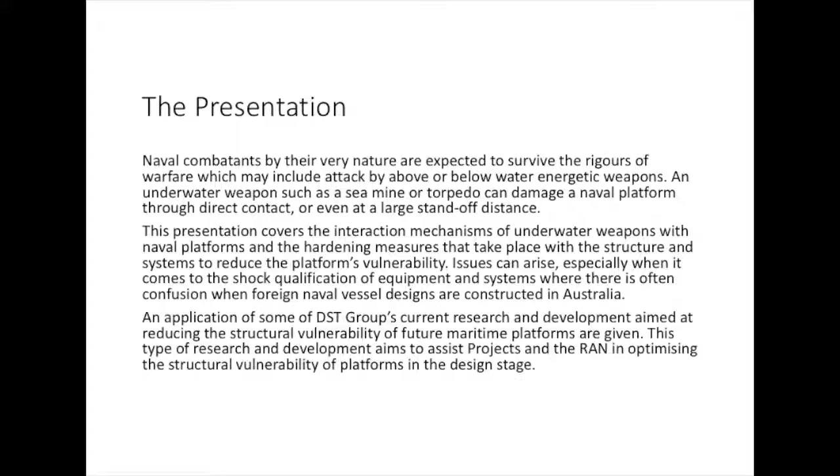So for those of you who don't know me, my name's Warren Reid from the Defence Science Technology Group. We're down on the Fisherman's Bend side, 4K down Lorimer Street here.

I guess what I'd like to do today, and I could have gone on for a long time, but considering it's winter solstice, I didn't want to go on too long tonight. What I hope to do is give you an overview of the underwater shock loading area, how it applies to naval platforms. As part of that, I'll cover some aspects of what we call equipment vulnerability, structural vulnerability of naval platforms, and then finish up with the last 10 or 15 minutes looking at whole platform shock testing to explain what that's all about.

A bit of corporate advertising here first, from Maritime Division of the Defence Science and Technology Group. We have sites at Fisherman's Bend just down the road here, also at Edinburgh South Australia, HMAS Stirling over in WA, up in Sydney, also smaller sites up in Queensland, probably test sites and so forth, about 2,100 people, I think, something of that order.

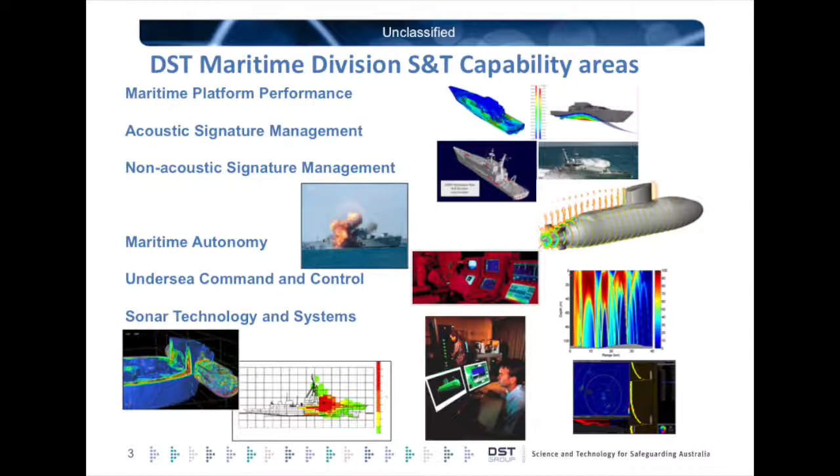In Maritime Division, we have what we call 6 major science technology capabilities. I'm part of the Maritime Platform Performance MSTC team that looks after this. We also have at Fisherman's Bend Acoustic Signature Management MSTC, Non-Acoustic Signature Management MSTC, and then in Sydney we have a Maritime Autonomy MSTC, and then spread across Edinburgh South Australia and also HMAS Stirling Perth we have 2 other MSTCs looking after undersea command and control, and also sonar technology and systems.

Since survivability, maritime warfighters try not to be fired at generally. So the outer layers of the onion represent not being seen out there, for instance. As you begin to move into the centre of the onion, if you are seen, you try not to be targeted. If you are targeted, you try to avoid a hit from a weapon that might occur. But ultimately, what I'm going to be talking about tonight is if you are targeted and the weapon does hit you, what we can do, or what we have done, to try to protect those naval platforms once they're hit by a weapon.

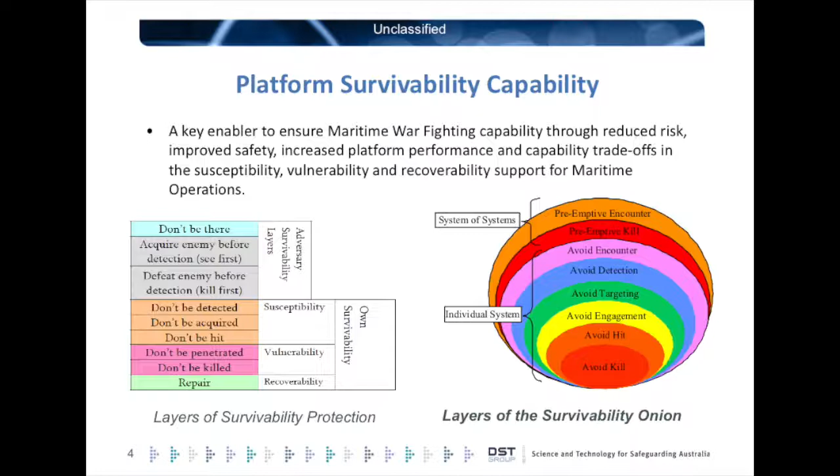Effectively, to survive, you can divide these areas up into what we call susceptibility, so trying not to be detected; vulnerability, which is the area I'll be talking about tonight, so what is the vulnerability of the platform if it does get hit; and there's also an area called recoverability, so after you have been hit, how can you recover the platform, or how well can you recover it and get back onto your mission.

So the group I look after is what's called the Dynamic Military Loads Group, and I get asked by a lot of people, was that something about moving logistics or moving defence equipment around the nation? But effectively for us it's looking at the immediate structural and equipment systems damage from a weapon attack, and we do all this work in support of the Navy, trying to give them much greater confidence in the survivability of their particular platforms.

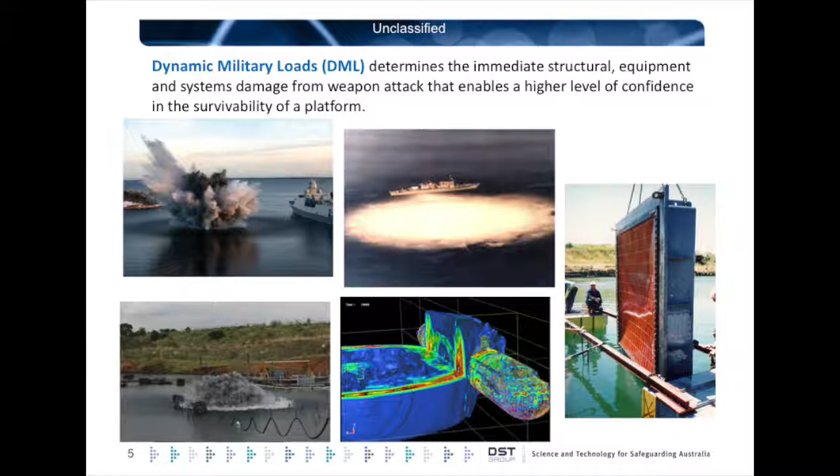In that particular area, the 4 areas that we consider in the work we do for the Navy are looking at the structural vulnerability of platforms, so how a structure will respond to a dynamic weapon loading. Obviously on naval platforms there's a lot of equipment on those ships, so there are aspects of equipment vulnerability or survivability of that equipment on board the platform. We also do a little bit occasionally on human vulnerability, as the performance of the systems is only as good as the performance of the humans on board, so if the humans are damaged, for want of a better word, then they can't operate those systems. And we also look at aspects of the requirements or the shock standards as they apply to Navy platforms. I guess there is a requirement on a lot of our platforms in terms of wanting a certain performance of that platform, in this case in an underwater shock loading environment.

Okay, so what is an underwater explosion? Whether it's an explosive that detonates in air or underwater, it's basically the same physics, but we get different behaviours of an explosive underwater.

If you imagine an explosive charge detonating, we usually use a detonator, a very high voltage detonator, to detonate explosives. When you detonate an explosive, you get a very high speed burning of that explosive, typically in the thousands of metres per second. That burn moves through the explosive charge, and when it gets to the outer perimeter of that charge, a shock wave forms and enters the medium, whether that be air or water.

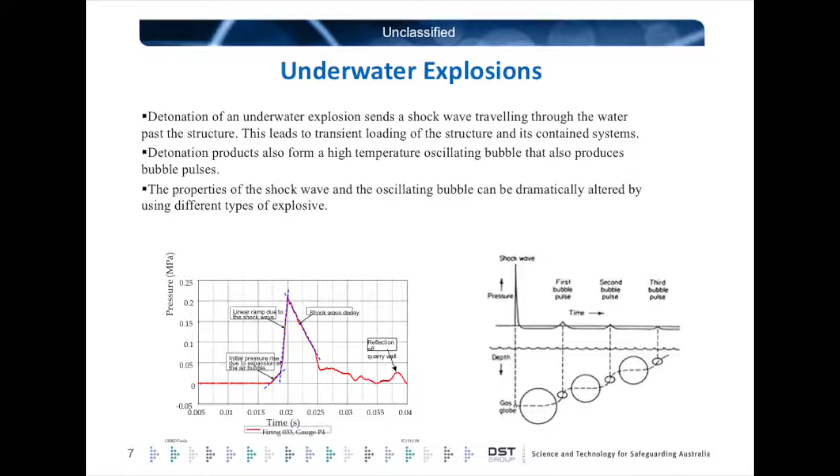That's where you pick up resonant frequencies in the hull girder, and for a close-in weapon, that's where you actually get a lot of damage to a ship hull by hogging and sagging and breaking the back of the ship. But I'll show you some of that shortly.

Okay, so that's the explosive side of things, what happens underwater. What are the typical damage mechanisms we get to a platform in this situation? I've mentioned the shock wave. That shock wave propagates through the water, and when it finds a structure nearby, it gets transmitted through the structure, through the hull plating, through the bulkheads, etc., up through the main deck, through the rest of the platform.

If the explosive charge is far enough away from the platform, it generally won't do any structural damage, but it can do quite significant equipment damage, and that's due to the very high accelerations that shock wave transmits to the structure of the platform.

If that explosive charge is much closer to the platform, you also get shockwave loading, and in this particular situation quite extensive hull plating damage. But the gas bubble, as it expands and contracts, has a resonant frequency that excites the natural frequency of the hull girder, causing breaking of the back of the platform. I'll show you this in the video shortly. After the bubble has hogged and sagged the ship, that gas bubble, if it's close enough, can actually collapse in on itself and form a water jet up through the ship.

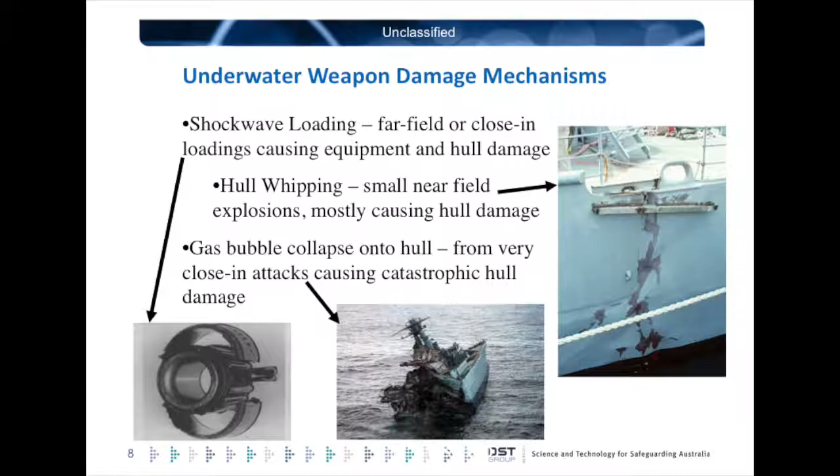And the next video I've got, hopefully this is going to work, fingers crossed. So this was a video from about 1999.

HMAS Collins, the first Collins class submarine, fired its first heavyweight Mark 48 torpedo in anger, and the unlucky recipient of this was the ex-HMAS Torrens. I should point out the Mark 48 torpedo has over 300 kilos of explosive. It's actually designed to sink cruisers, maybe about four times the tonnage of Torrens.

So what you're about to see here is quite significant devastation, but it's a great video to show all these different mechanisms. Though I tell people it's actually a lousy video to show because this is not what typically happens, certainly for a small ship. In the real world, there's only been 3 torpedoes fired in anger since World War II.

One was in the Falklands, the Belgrano, an Argentinian vessel. One was, I can't remember, the Pakistanis or the Indians, one fired on the other and took out one of their corvettes. And then recently, or allegedly, the North Koreans may have fired a torpedo at one of the South Korean corvettes. I think it was about 2010.

But when I talk about underwater shock loading, there's been hundreds and hundreds of mining incidents since World War II. So when you see a torpedo hit, you think there's not much you can do about this platform, but a lot of what we do applies to mining incidents as well as to naval platforms.

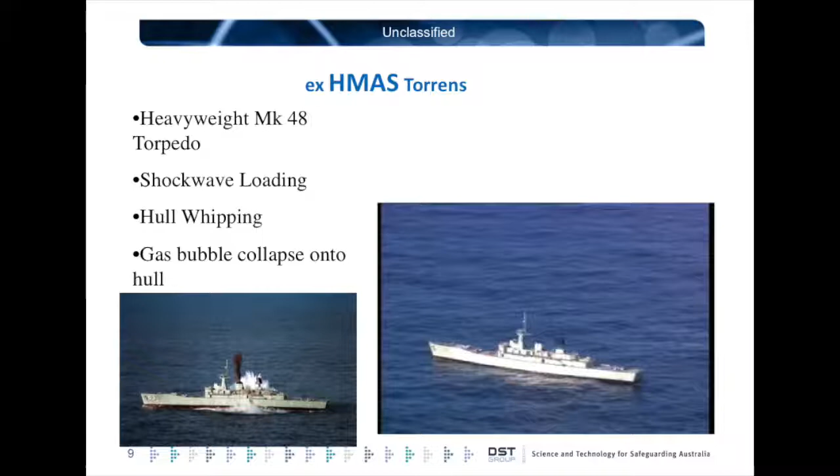You'll see the ship hog up initially, due to that big gas bubble expanding. You'll see it then sag as the gas bubble contracts, and then you'll see the gas bubble collapse in on the underside of the ship and jet up through the structure. So, fingers crossed.

Okay, we'll move on. So in the rest of this presentation, what I mainly like to concentrate on is just the shock loading part of these mechanisms acting on a platform. There's a lot of information around what I could go into for the bubble collapse, but I'll just cover the shock loading side of things.

What actually happens when that shock wave interacts with the structure of the ship is that it reaches the hull structure at about 1500 metres per second. That shock wave is then transmitted through the structure of the ship. If you look at the response of the platform in this particular location, doing a velocity versus time plot, you'll see a very sharp rise in time and a change in velocity as that shock wave interacts with the ship. That's then followed by, after the shock loading stops, a gradual decay as the ship settles back down again.

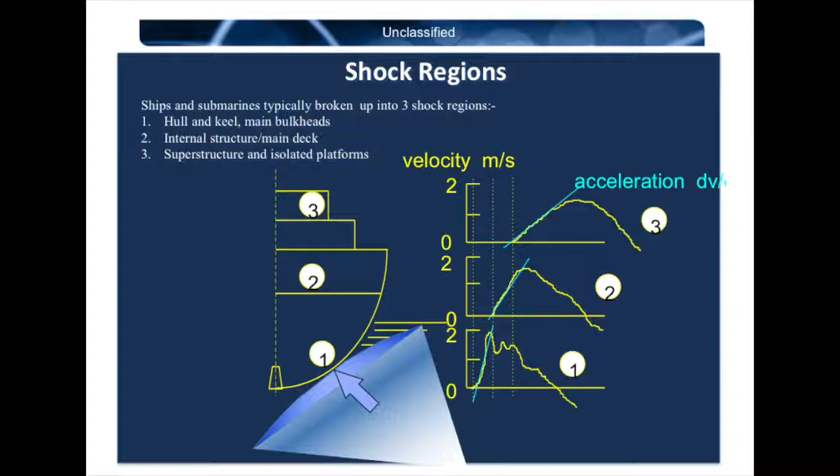So just to show that a bit more, if we have an explosive charge a long way from a platform detonating at that large distance, you begin to get temporary disabling of equipment. Your mission capability of the platform may be degraded a little bit, but usually you get all those systems up and running again.

Moving in a little bit closer, you may need some shipyard assistance after there's been a shock load on the platform, especially non-hardened equipment such as commercial off-the-shelf equipment that may have failed.

Moving in closer again, you'll find hardened systems and possibly human systems beginning to fail. For humans, if they're standing, it could mean breaking of ankles and kneecaps. In fact, the safest position for a human is up on the superstructure, maybe on a gas strut chair or something like that.

And then finally, if the video of Torrens had worked, you begin to get serious hull damage, like you saw with Torrens there.

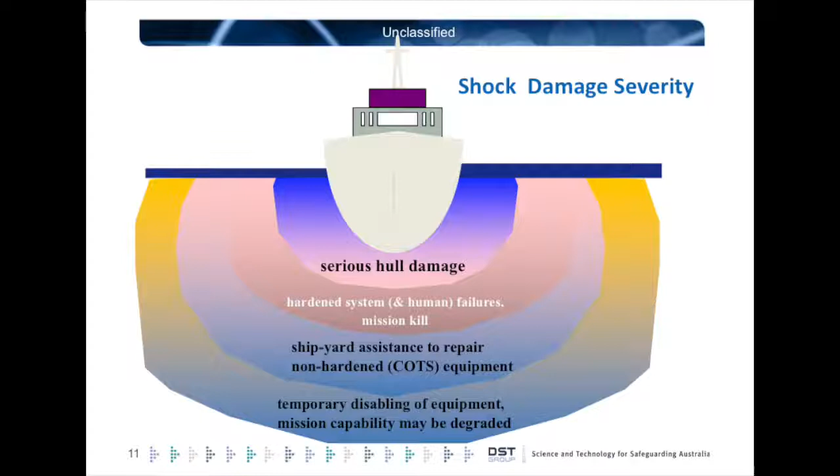In that case with Torrens, you saw the bubble doing a lot of damage to the platform, but the shock wave would have also caved in the underside of the platform in that situation.

So what do we do to try and protect Navy vessels a bit more? Generally the hull is a lot more shock resistant than the equipment. However, with those closer loadings, you can get significant hull plating or structural damage.

With the equipment and systems, if they're critical to the float, move and fight parts of the platform - so navigation, propulsion, combat systems, etc. - that equipment will often go through a shock hardening process, and I'll show a bit more of that shortly.

One of the important things is equipment that's gone through a shock hardening process generally goes in a laboratory shock test machine, but there's no guarantee that equipment will survive the same shock loading on a ship. So one of the things we do is a full-scale ship shock trial.

That's where you take that platform, blue water, detonate a large explosive charge next to it, hopefully everything survives, and you can sail back and forth.

These days there's a move to put a lot more commercial off-the-shelf equipment on platforms rather than going through a shock hardening process, and you can get that equipment to survive by using resilient mounting, shock mounts. One problem with shock mounts is that big displacements can cause equipment to hit each other and take each other out.

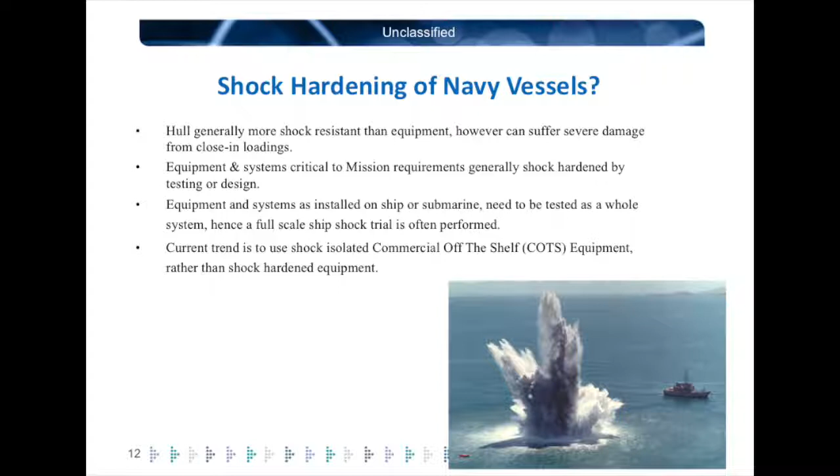Australia has a shock standard for the Royal Australian Navy in terms of the response or survivability we expect from our platforms regarding equipment and structure. Prior to about the mid-90s, we actually didn't have one.

We relied on overseas designs and the shock standards that came with them. What actually highlighted some of the issues from not having a shock standard was that our Collins-class submarines had a Swedish hull with a US combat system, and no one knew how that related to each other - whether the Swedish hull would survive a higher level than the US combat system.

As a result of that, we ended up trying to produce our own shock standard, which has now been utilised in various acquisition platforms over the last few years.

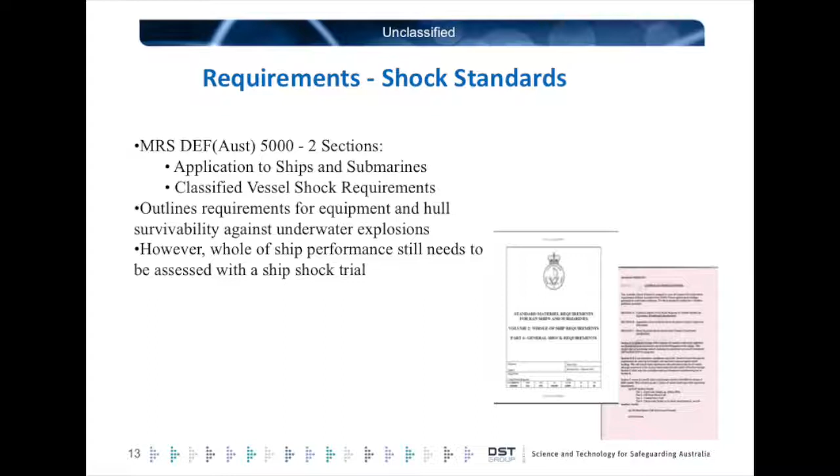In terms of shock hardening equipment, we generally aim to reproduce the same sort of shock environment on board a naval platform. The first three of these testing techniques - floating shock platform, medium-weight shock machine, and lightweight shock test machine - are pretty common throughout the world. These are standard US shock testing machines.

For each of these machines, depending on the mass of equipment put on there, the floating shock platform can take masses up to about 28 tonnes. The medium-weight shock machine is about 1.5 to 2 tonnes, and the lightweight shock machine is just for small items of equipment. This is a picture of a medium-weight shock machine here.

Quite simple - it's just a mechanical shock loading machine where you have an anvil table, in this case with a radar set up on it. There's a huge hammer, a one-ton hammer that swings through an arc and comes up underneath that platform, giving it a mechanical shock load. That's more of a US and a little bit of UK philosophy.

You find if you look at equipment tested to European specification, they tend to use more drop towers, electromagnetic shakers and other types of specialist equipment.

I did have a video of a floating shock platform being shock loaded here, but you would have seen a big splash, heard a big bang, everything shake. I'm afraid that's about all - actually, I'll try and see what happens. This video is a lot smaller.

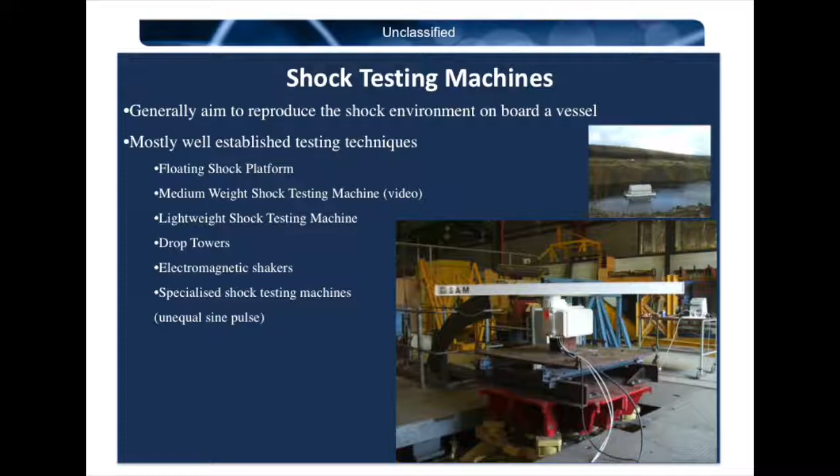I'm not. That's probably off. If the other one didn't play, I suppose. Oh, okay, this one is going to play.

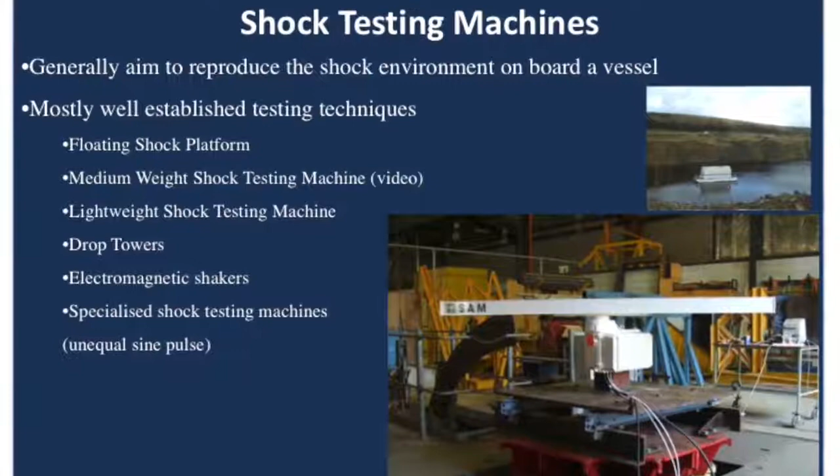So, there's explosive underneath here, about 20 kilos of explosive. If you listen carefully, you'll hear the explosive detonation, but you'll also hear the bubble pulses, and you'll see the bubble pulses as they affect the platform. You see the platform give another couple of jumps. I'll play it again. So if you listen very carefully after the detonation, you'll hear the bubble pulses, and you see the platform jump again a couple of times.

But that's a much longer duration loading from those bubble pulses, and it can do an awful lot of damage, especially for instance to low frequency response equipment, like engines on shock mounts.

Just to cover, we don't generally do a lot of work in the equipment vulnerability side of things, but just to give you one example of some of the work we've done in the past, we did have an explosive test facility at Epping, about half an hour's drive from here. That's since been eaten up by local commercial encroachment from various buildings nearby, but we do have a new facility we're developing about an hour and a half's drive from Melbourne, up near Nagambie, a much bigger and potentially much more useful facility.

As an example of some of the work we do in the equipment vulnerability side of things, the Collins class submarine has about 150 hull penetrations, doing various things, and a lot of those are for taking cooling water in and out of the platform. One of the biggest problems with shock loading is if you get a major failure of those hull penetrations or the valve behind it, you'll get immediate and catastrophic flooding of the submarine. So I guess the hull valves tend to be considered fairly important.

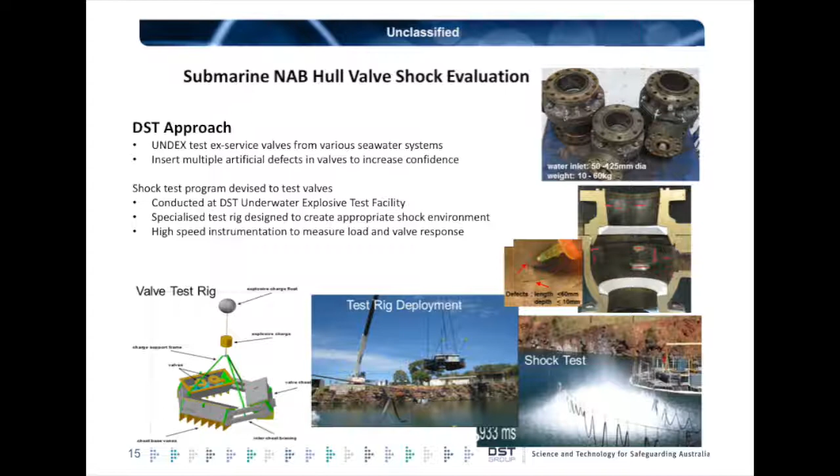Okay, that was equipment vulnerability. I'd like to quickly give you an overview of some of the work we do in the structural vulnerability area. It became apparent to us a few years ago that we get asked to comment on various naval acquisitions and the technical aspects of those acquisitions.

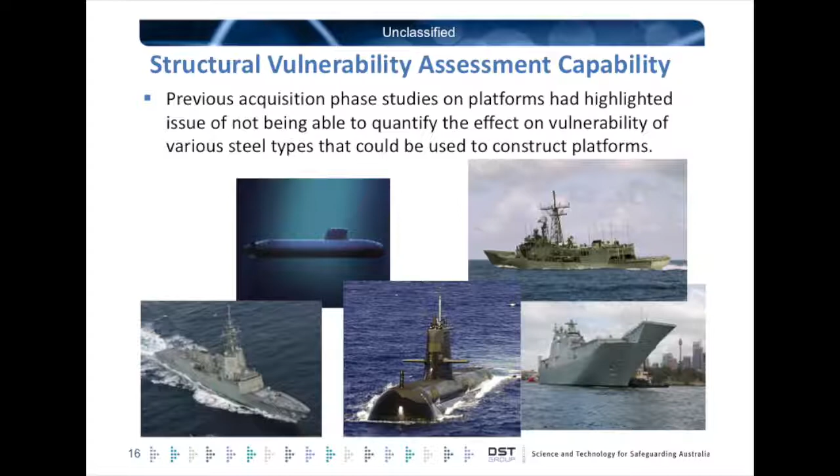One thing we realised is when we've commented, for instance, in the past on the structural vulnerability of those platforms, in terms of the steels they're made from, we didn't have a real means of quantifying the performance of that steel in terms of overall platform vulnerability. So for instance, comparing one steel with another, we'd like to say this one has a vulnerability improvement of, say, 10%, but we didn't really have a process to go through for that. So one of our current work programs is looking exactly at that, and this is a roadmap or narrative of what we're doing here.

We have a lot of experience in the dynamic loads or shockwave loads physics area. We've also got people on site with a lot of experience in material properties and performance of materials at high strain rates. Compared with quasi-static strain rates, explosive loading can produce strain rates of 10 to the 4 or 10 to the 5 per second. At those loading rates, the properties of materials can change quite dramatically in terms of ultimate tensile strength, yield strength, and so forth.

With that information and some of our vulnerability code, all this comes together and we can do a vulnerability prediction of the performance of a platform. Combined with our regulatory requirements, shock standards, and vulnerability assessment, we can make comments about the platform's viability and capability, for instance after it may have been shock loaded.

To indicate some of that work, what we're doing at the moment might be looking at the performance of different types of steels for future platforms. We're looking at a combination of microstructural modelling of those steels. At the moment, to find out the mechanical properties of those steels you need to do a lot of testing, but we're hoping to use software to model the performance of those steels from looking at the microstructure.

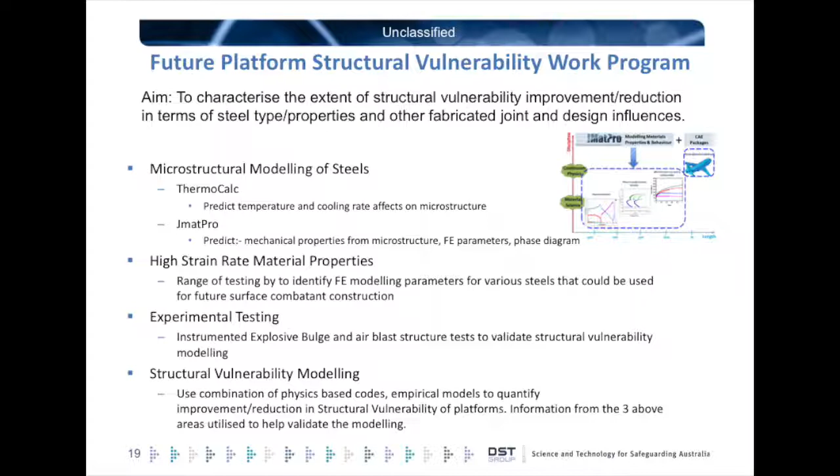High strain rate properties of materials - we've done a lot of work with Nordmetall in Germany, giving them steel samples for relatively high strain rate testing. We also do some high strain rate testing ourselves, combined with experimental testing such as explosive bulge tests. Those three areas come together in our structural vulnerability model.

To talk about the high strain rate material testing - we're utilising what we call a standard explosive bulge test. We have a big steel die block, about 750 millimetres square and up to 300 or more millimetres deep. You place on top of that a steel plate, typical section ship hull plating, and above that we detonate an explosive charge at a certain standoff.

Typically what happens is the plate deforms - we test a range of temperatures, looking for the ductile brittle transition temperature of that steel plate. The more energy it can absorb at a lower temperature means that material is much tougher in terms of fracture toughness, and ideally that's the sort of steel you want when you're getting explosive loading on platforms.

We've also worked on a variation of this test, changing the explosive charge size and moving different distances away - that's been part of our high strain rate explosive testing. From that we're trying to get the specimens to deform at different rates, and capture that information with sensors.

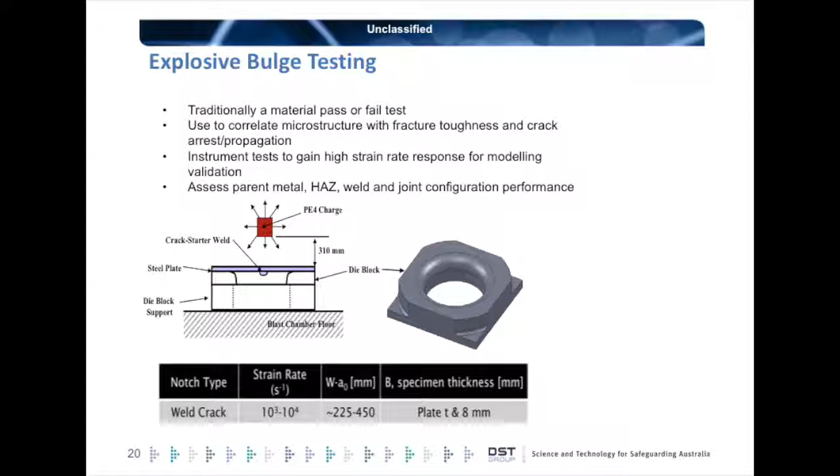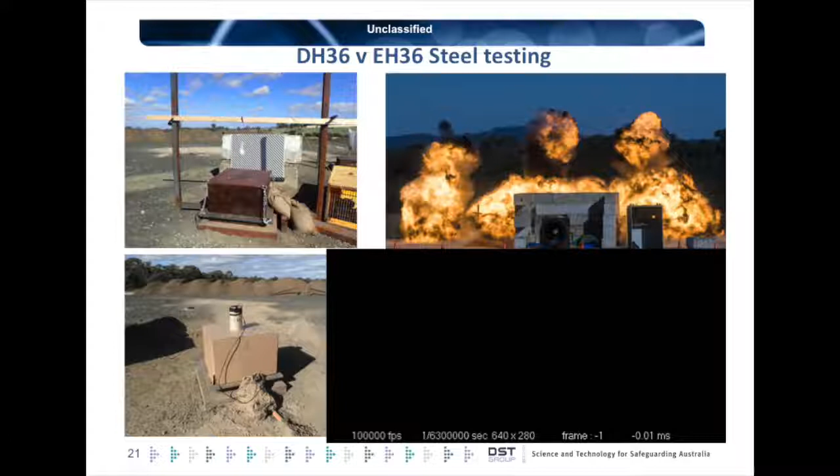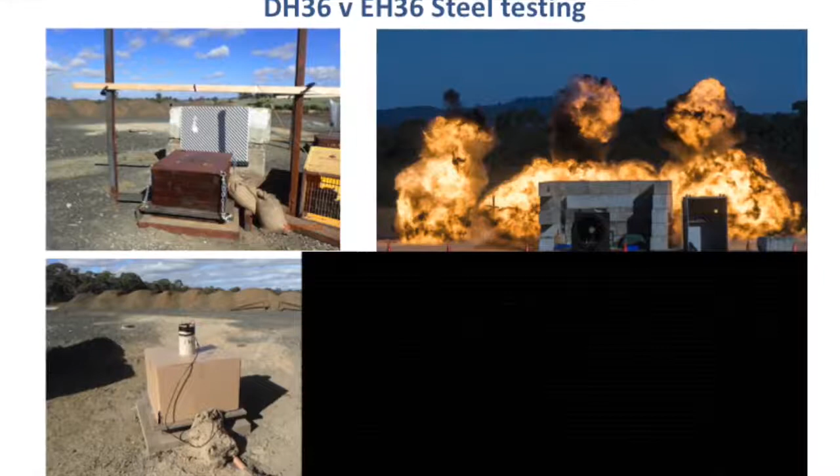Hopefully the video works - this is high-speed video showing an explosive bulge test. What we're trying to do is capture the loading situation with sensors on the plate and look at the performance of that plate. What you saw was in slow motion, but from start to finish it's only about a couple of milliseconds.

To show some of those results - for instance the DH36 steel versus the EH36 steel, both 360 megapascal yield, typical ship hull plating steel. In one of those explosive bulge tests with a crack arrest starter weld, as the plates deform the DH grade, which is a lesser grade than the EH grade, begins to split, but the EH grade steel stays intact.

In this work program, what we're trying to do is build up the ability to quantify the performance difference between these two steels - if you made one platform out of D grade steel and another out of E grade steel, hopefully you can say there's a 15% improvement in the vulnerability performance of that platform.

Let's just show some of the modelling we've been doing of this particular explosive bulge test. There's no video information of that.

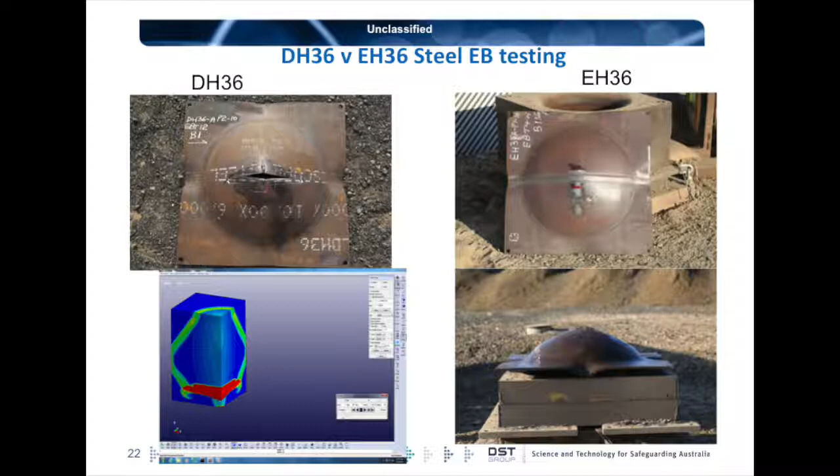Okay, just very quickly, some of the structural vulnerability prediction techniques that we have available to us. Our traditional techniques are usually empirical-based codes, so we've done a lot of testing in the past, looked at the performance of various scale and non-scale structures.

We also have been doing a lot of work lately on fully coupled physics-based codes, such as, for instance, LS-DYNA. Whereas the empirical-based codes can run straight away, you get an answer immediately, one issue is if you change the structure of the platform and move to a different platform, you need to reconfigure those algorithms to match that particular platform.

One of the advantages with LS-DYNA, a physics-based code, is that, for instance, in this case with a submarine hull plating, you can model in detail the shock wave moving through the platform, the response of that hull plate and so forth. The only problem is that whereas the empirical code might run straight away, this scenario might take three or four days to run, only looking at about 10 to 15 milliseconds.

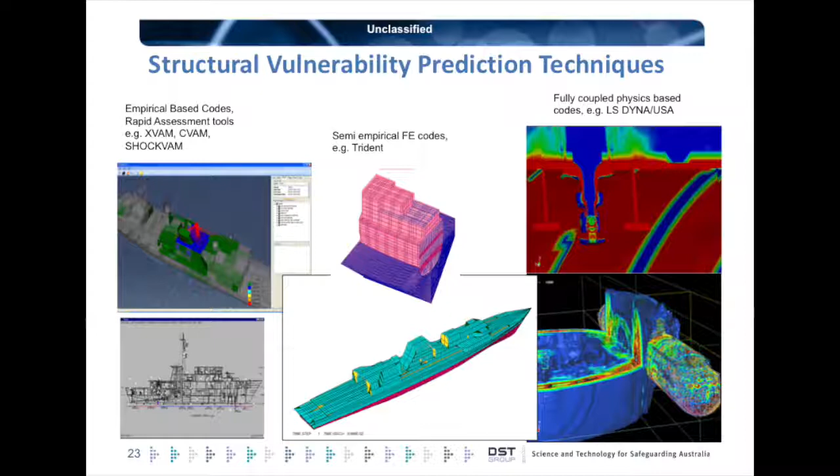What we're looking at is somewhere in between these two codes in the future, where, for instance, we have access to a semi-empirical FE code. In this case, if you want to model the whole platform it would probably take a couple of years to run with a fully coupled physics code, but with this semi-empirical approach, halfway between the two, it might take, for instance, a few hours to run a full ship structural evaluation.

Okay, just the last bit I wanted to cover, and probably gone on too long already, but how do we prove to the Navy that their platforms will survive a real shock loading scenario? Typically what has been done in the past is a full-scale shock trial. This is basically taking that platform out into blue water, typically off the continental shelf around Australia, and detonating a large explosive charge.

The US has done this a lot in the past, we've done a little bit, but one of the major problems is it's a hugely expensive way of doing it. You tie up the vessel's crew, the platform, trials personnel, huge logistics. Imagine getting that platform out there, getting the explosive charge out there deployed, you've got support ships and everything else. For instance, the US tests spent up to about $30 million, and that includes also the panel beating of the platform afterwards, knocking some of the dents back.

But probably one of the biggest disadvantages of this is environmental considerations. As you can imagine, about 25 years ago the US tested one of their aircraft carriers, they detonated a 20-tonne explosive charge next to it. The reason they use such a large explosive charge is they want a planar shock wave getting to the platform and loading every single bit of the structure and every single bit of equipment.

As you can imagine, that's probably not great for the environment, especially with migrating whales or dolphins or whatever else around. So there are some pretty major environmental considerations. In fact, you probably need to keep an area clear of about a couple of kilometres around the platform when you're doing those tests, with aeroplanes in the air looking for mammals, and various boats in the water doing the same thing.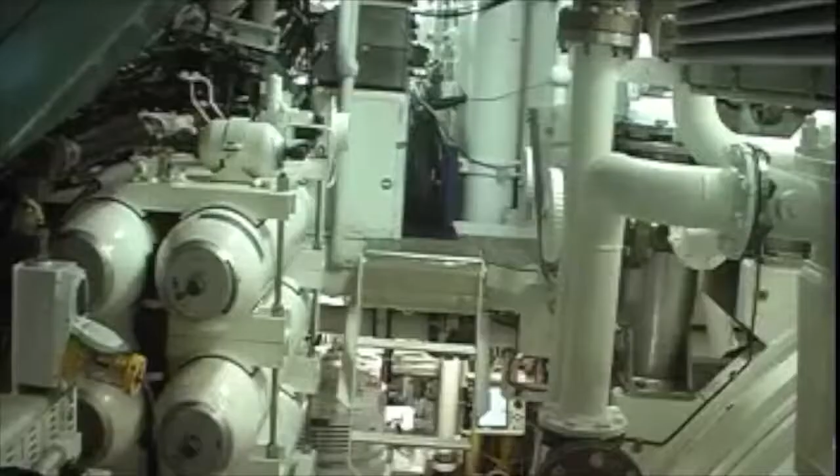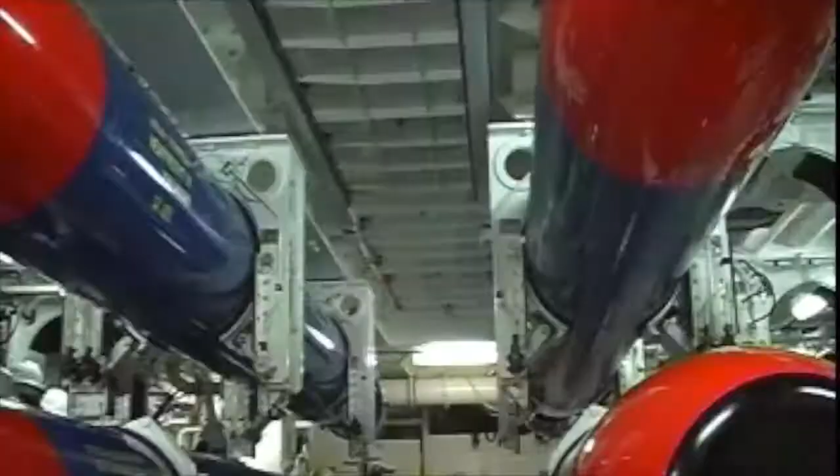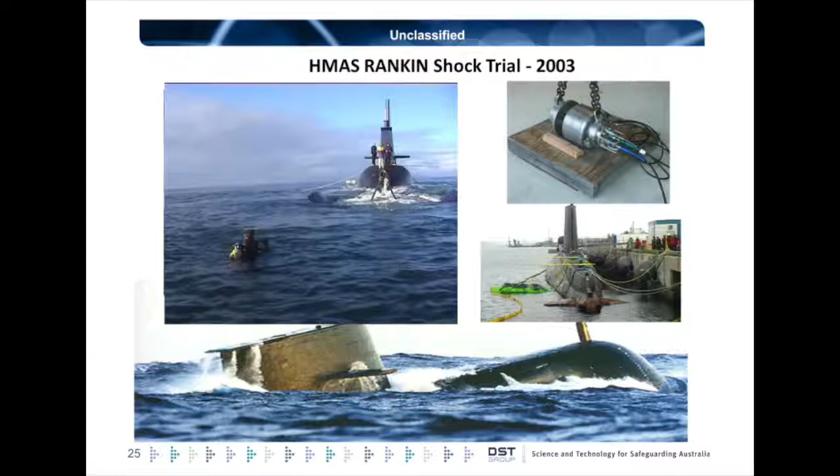Collins did pretty well on that shock test. We ticked the box in terms of its surviving the shock loading. However, we didn't detonate anywhere near as large an explosive charge as the US did. But there are still major environmental considerations in that trial, and it's unlikely we'll be able to do another trial like that here in Australia. So what are the alternatives?

You can rely upon some of your experience in terms of determining how equipment fails. If you've got new equipment on board those platforms, you may or may not be able to predict whether it's going to fail. You can do scale experiments, various numerical modelling. I think a lot of people hope to do numerical modelling and simulation of platforms in the future and not have to do any shock testing. But there are alternative methods.

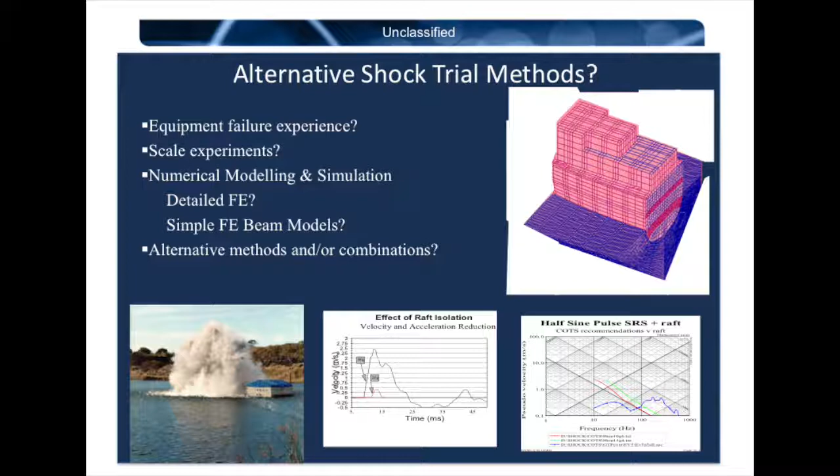For the last few slides, I'd like to cover some of those alternatives that we're considering here in Australia. One of those is seismic air guns.

For those who don't know, seismic air guns are used in the oil and gas exploration industry. They're about the size of a 9 kilo barbecue gas cylinder, but weigh about 100 kilos, very thick-walled stainless steel. Basically just an air storage container, and you can fire them electrically to release that air out into the water. When they're used in oil and gas exploration, they'll tow about 50 of these things behind the ship, fire them, and look at that acoustic signal and how it bounces off the seabed, and from that you can assess whether there's oil and gas down there. Very reliable — you can fire these things probably 20,000 times a day, and they're an off-the-shelf item.

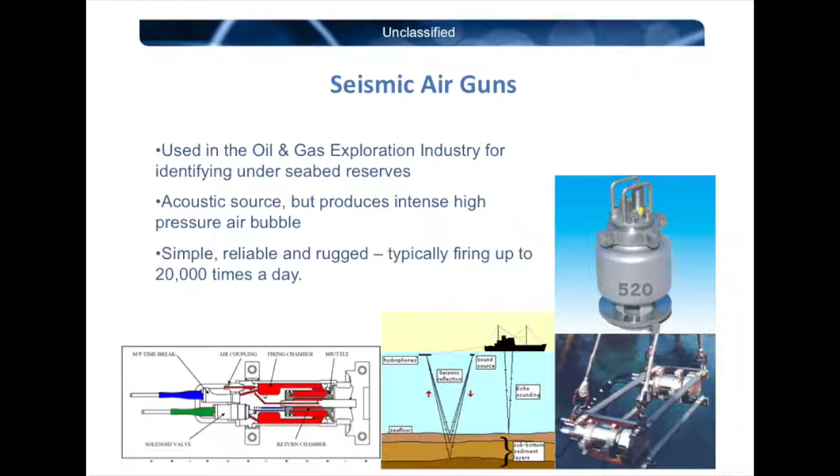So what are the advantages potentially of using an air gun? There's no explosives handling or misfire problems. If you have an explosive misfire, you've actually got to stand back for at least a couple of hours to make sure that explosive isn't burning away underwater or other issues. So there's consequently low risk to the ship's crew, trials team, and also maybe divers, and also from the environment. I'll cover more of that shortly.

It's very repeatable in terms of the pressure pulse they put out and the loading they put on the platform. As an example, cost-wise, the Australian test on HMAS Rankin cost about $5 million to perform. We're estimating that same test with air guns would be about $1.5 million. One of the big savings on the logistics side is that you no longer have to take that platform out into blue water — you can leave it tied up alongside the port and just fire the air guns against that platform. You may or may not need the crew on board, and it takes away all the requirements for support vessels, etc. Most importantly, rather than explosive residue in the water, you've only got compressed air.

The other important factor is you probably only need a very small mammal exclusion zone around that platform, rather than a couple of kilometres with an explosive charge.

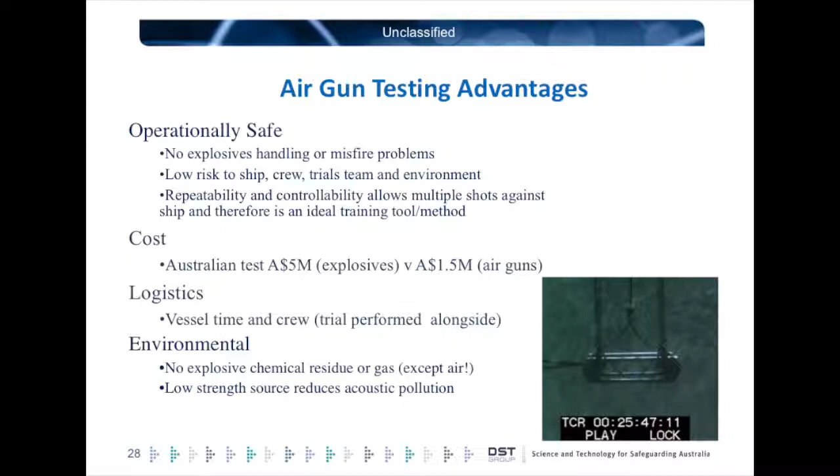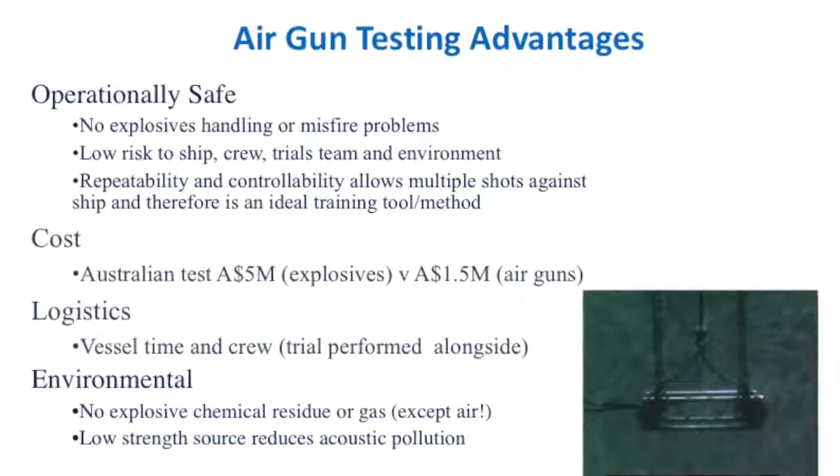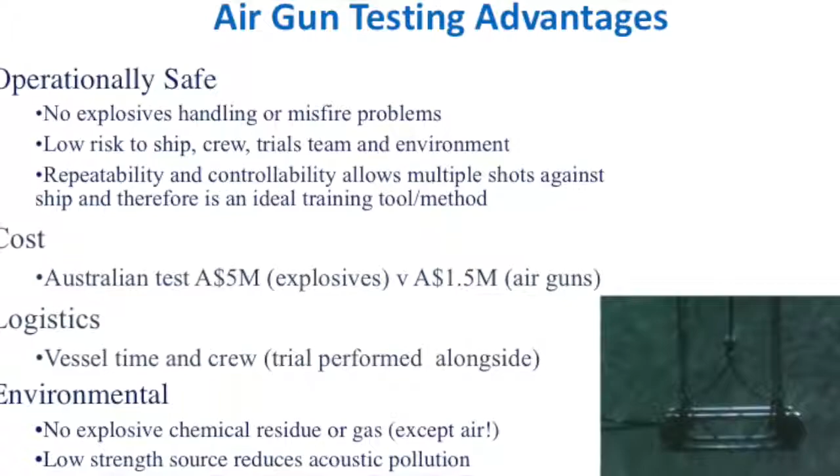Just to show you a couple of air guns firing — these are just standard air guns, in the configuration they have when used in oil and gas exploration. You'll actually see similar behaviour to what you see with an explosive. You won't see the pressure pulse, but you see the gas rush suddenly into the water, bubbles come together, and you just get that pulsation effect as you would with an explosive charge.

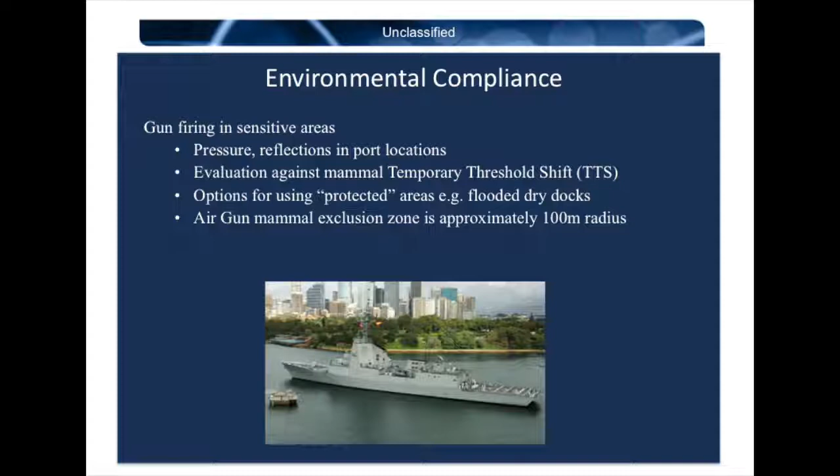Environmentally it's much easier to do. However, there's still a requirement to have an exclusion zone around these guns — about 100 metres radius, so that should actually be 100 metres diameter. Around the platform, you probably only need an exclusion zone of about 50 metres. But if we do one of these tests, we will have to go through the environmental requirements and make sure we're not going to harm any passing dolphins.

The big disadvantage with air guns is that with explosives, you can have them 100 metres away from a platform and still get quite significant shock loading. With air guns, you'll have to have them right up against the hull of the platform, because the pressure profile is significantly smaller than an explosive charge.

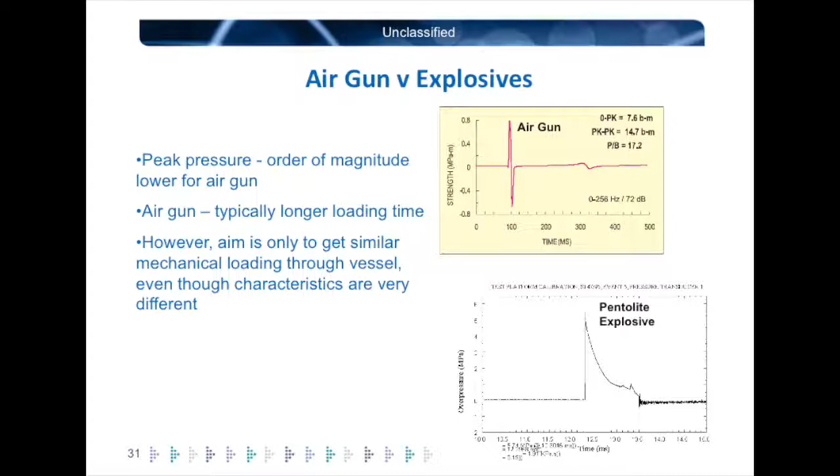One disadvantage with this is that you've now got point loads acting on the structure of the ship, so there's a danger you can do localised structural damage. That's one of the aspects we've been looking at over the last few years, as to how far to stand them off and how much pressure to use. You can fire these air guns at about 3,000 PSI.

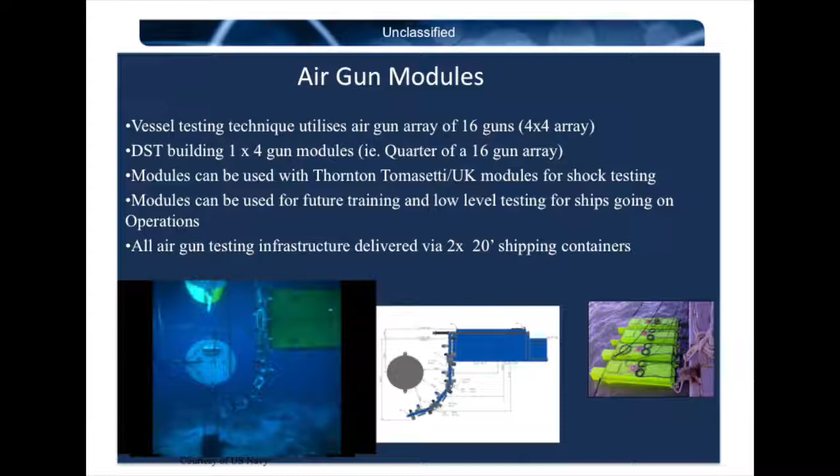Here's a bit of video - you can see some of these air guns firing up toward the module. This is the float, there's the water surface, you can see reflections, but you get the pressure pulse from the air gun, and then the water that's pushed out ahead of the air gun bubble coming out. It's those two mechanisms that, like an explosive charge, excite the natural response frequencies of a ship - that's what the air guns do too. One issue with the air guns is they don't quite excite all the very high natural frequency responses you get with an explosive charge.

Okay, so last slide - potentially we're looking to run a future RAN shock trial with air guns in the future, because it's unlikely we're going to get permission to fire explosive charges in the water again. We'll be working with Thornton Tomasetti, the UK Ministry of Defence, and also the Canadian Department of Defence. The Canadians actually did a shock trial on one of their submarines a couple of years ago, but this was towards the end of its life.

There's going to be an opportunity to test the platform dockside, or potentially we could also test in a flooded dry dock. If we do it in a flooded dry dock, that takes away all the environmental considerations we have to worry about. We may or may not have a crew present, with only a 2-week test period. If you did an explosive test, it may go on for months as you bring the platform backwards and forwards - you might only do one explosive charge a week. With the air guns, you can fire them every 10 seconds if you want to.

Most importantly, we could use the structural response map of that platform. With that structural response map, you can't load at the full design level of what that platform will survive in shock loading, but we then use modelling and simulation to scale up those responses and do a comparison with how equipment's likely to perform in that situation.

So that's my last slide. Apologies for the one video that didn't work. The Torrens video, as Stephen said, is potentially online on YouTube. Look up HMAS Torrens, and in that video you'll see all those elements of the shock loading.